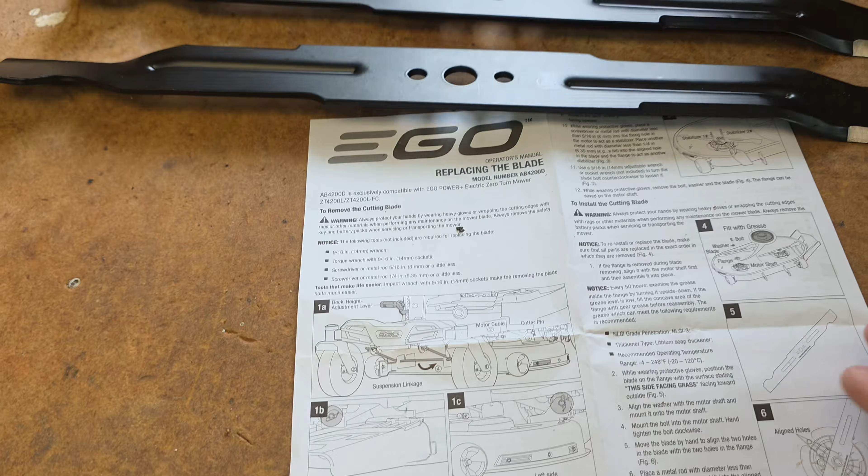Here's the model number of blades, for the 42-inch. You get 2 blades, I'll put a link to them in the show description notes. Here's the blades, they already come sharp, and I love that it comes with a manual in the box of how to change the blades.

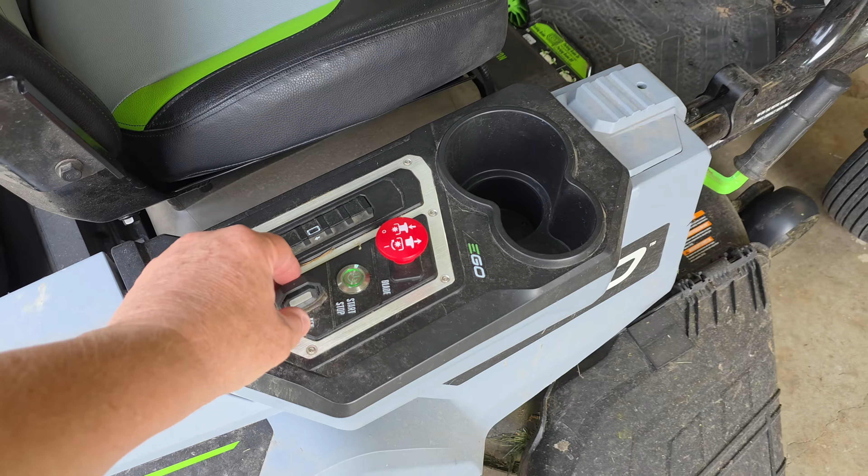So let's get started. I know because you're here to remove the deck. You want to remove the safety key. You can shut it down first, but I think removing the safety key takes everything away. Make sure the parking brake's on. As an extra precaution, I'm going to take the batteries out because it only gets power from the batteries. So I'm going to pop these batteries, that way it is completely dead. There's not even a light on here. There's no way, the charger's not plugged in. It is completely dead and the key's out.

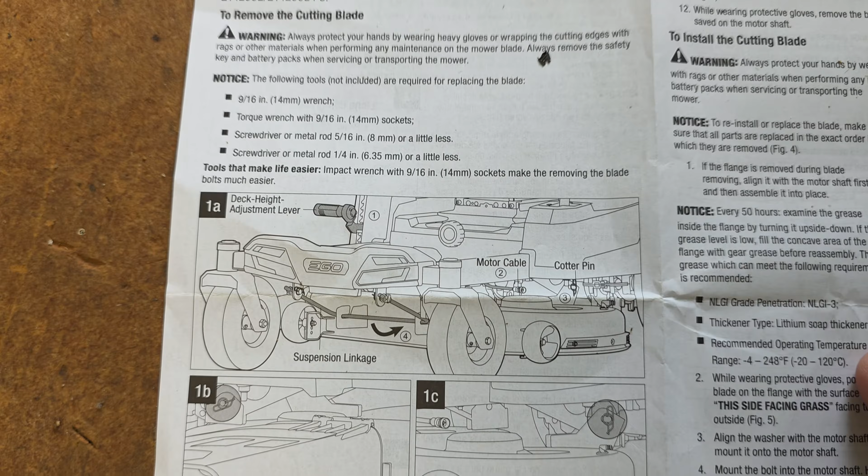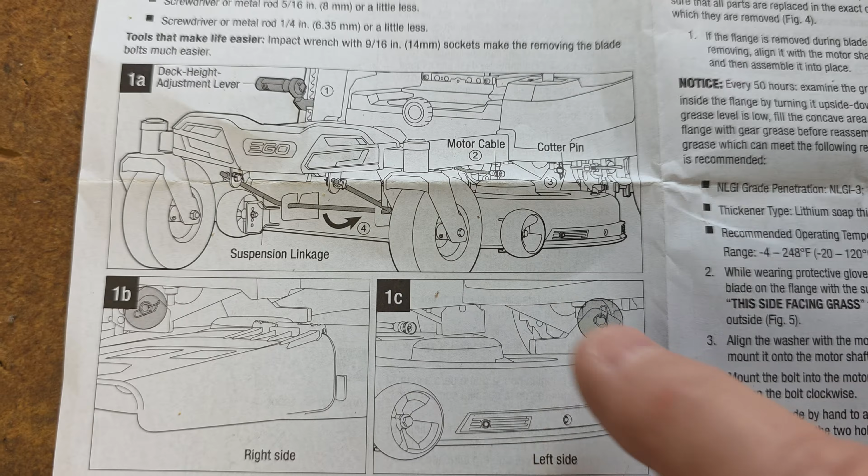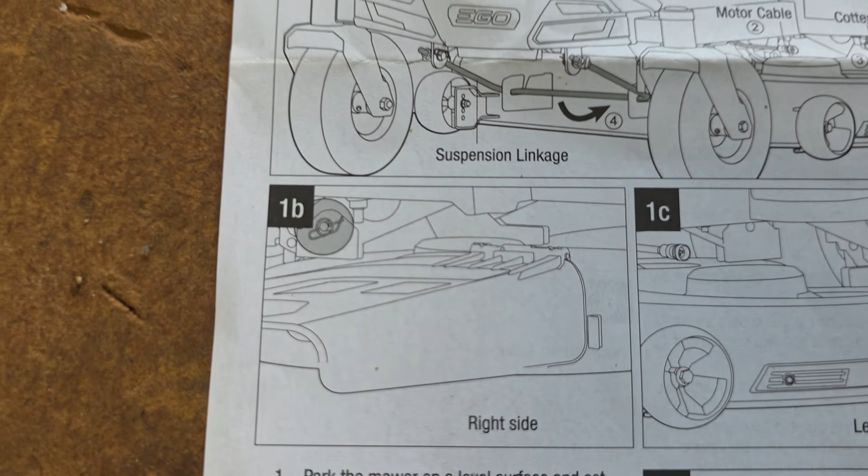Now we're going to need a 9/16 socket. You're going to put the handle, I'm going to show you these instructions. And again, there's the model number AB4200D for the blades. Put the adjustment height all the way down, and apparently there's 2 cotter pins. We got to remove the motor cable. I've never done this. And then there's that standard hook on the front, and then you're going to turn it out the side. It gives you a really fine, good detail of where those reusable cotter pins are, it looks like.

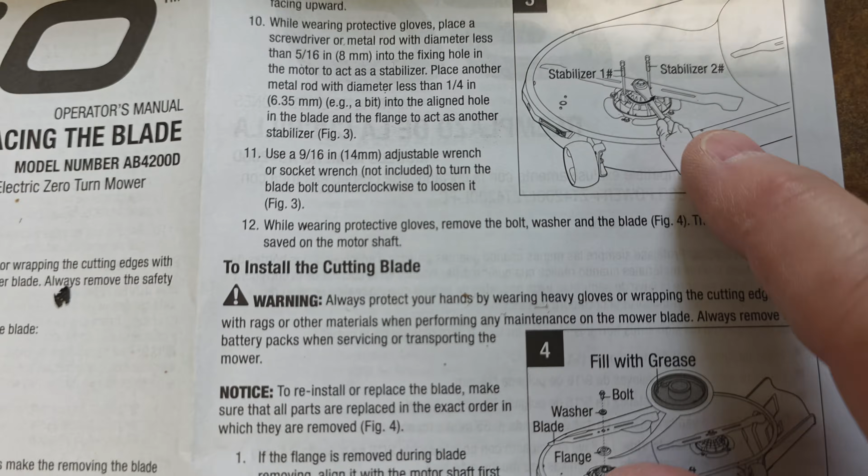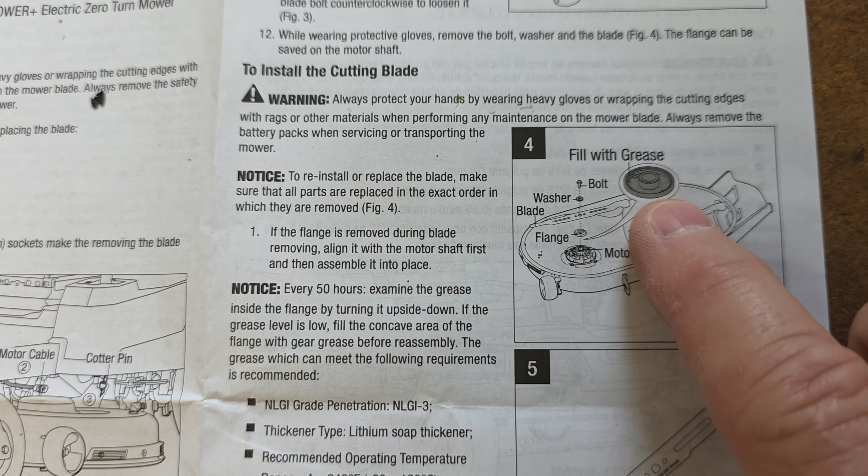And then you're going to put some stabilizer bolts in these holes to stabilize it. Take the socket, get it off. You're going to look for some grease, you may have to put some grease. It says every 50 hours examine the grease. We're going to find that, there's the specs on the grease. And then it's just reversing it.

One key feature is these blades say this side facing grass, so that's the downside. Both of these blades are exactly the same, and the blades are right at 21 inches, just a little under 21 inches each.

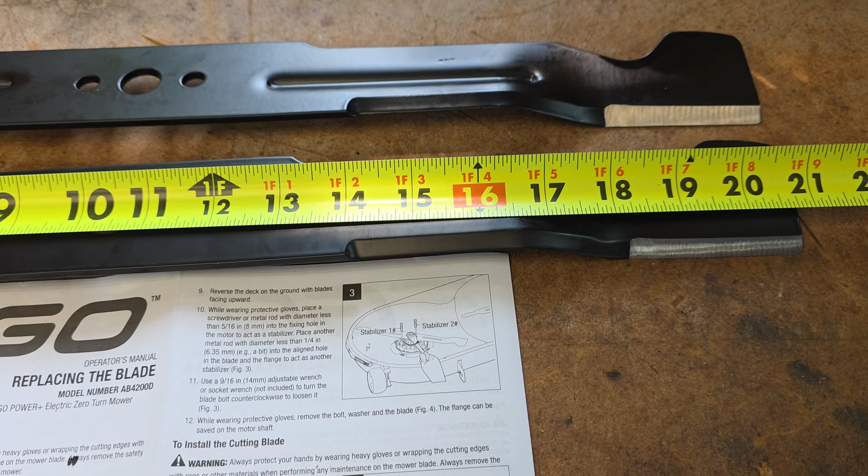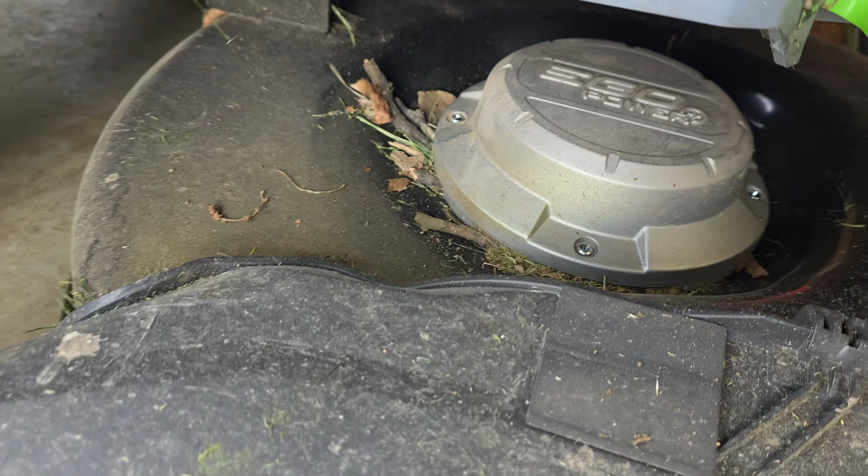Okay, draw a line so you know where to put it back to. Put that all the way down, it's kind of heavy. All right, it's all the way down. Now let's examine where these are. I've never had this deck off. Okay, that looks pretty simple, we're going to take that off.

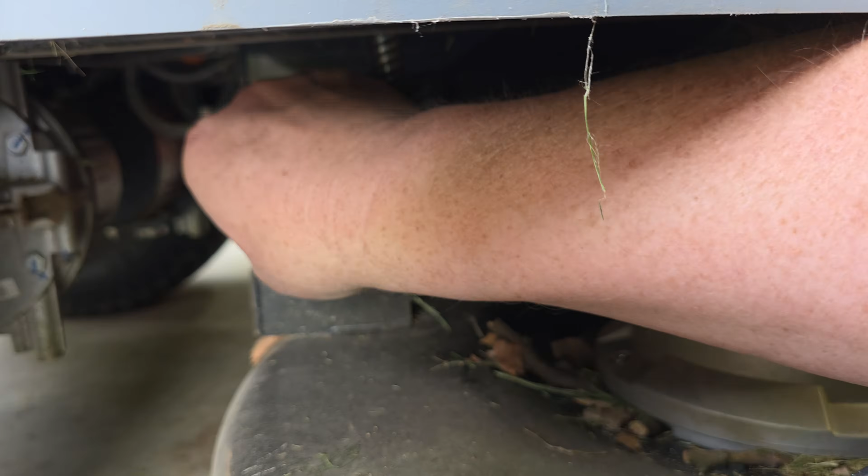I think if you lift, yeah, that is super easy. Oh, it's out. Now we got to take the clevis pin out, that might be a little challenging. We got to disconnect some cables. I'm going to get some gloves on.

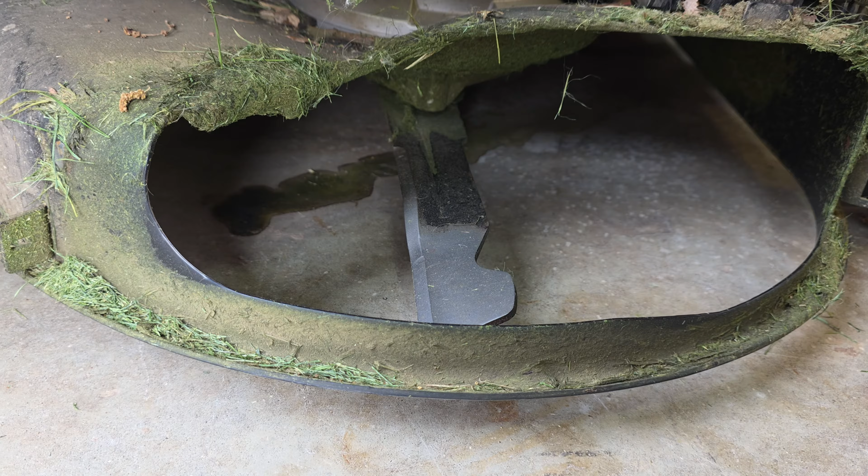If you're in a hurry, you might be able to do this without taking the deck off. Use a piece of wood to wedge it, put the deck all the way up and just use a 9/16 inch. That's what I originally planned, but I probably need to take this deck off, so I thought I would do a how-to video. These are the most amazing gloves in the world, made by Milwaukee. It's all I use now.

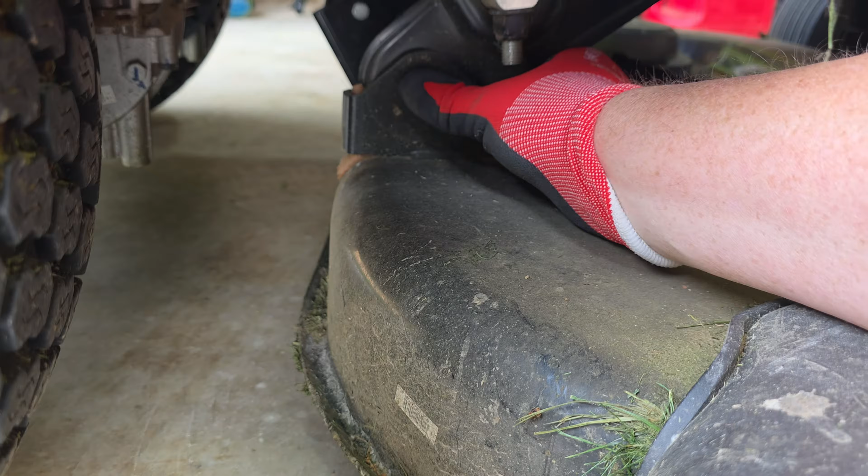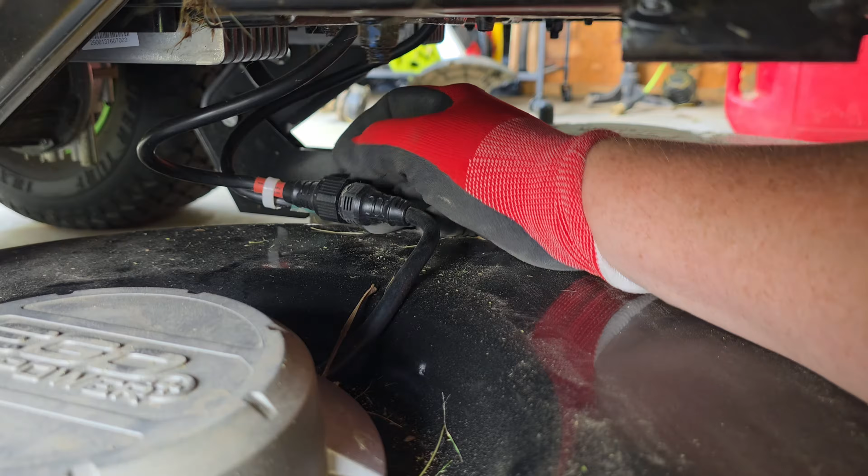Okay, that's going to be kind of tricky to get out, we'll have to do something later. There's 2 of these connectors. Let me undo one and then I'll show you how. It's going to take 2 hands, but I'm going to show you. You're going to turn this collar, that collar turns right there. It took me 2 hands to undo it. You want to hold this and turn that collar.

Hopefully it's focused for you. So there, yeah, then it just unscrews. All right, here's what it looks like. Looks like it's probably got some grease on it.

I definitely want to make sure the red is on the right and the other one's on the left. So maybe they're the same. I'm not sure, we'll see.

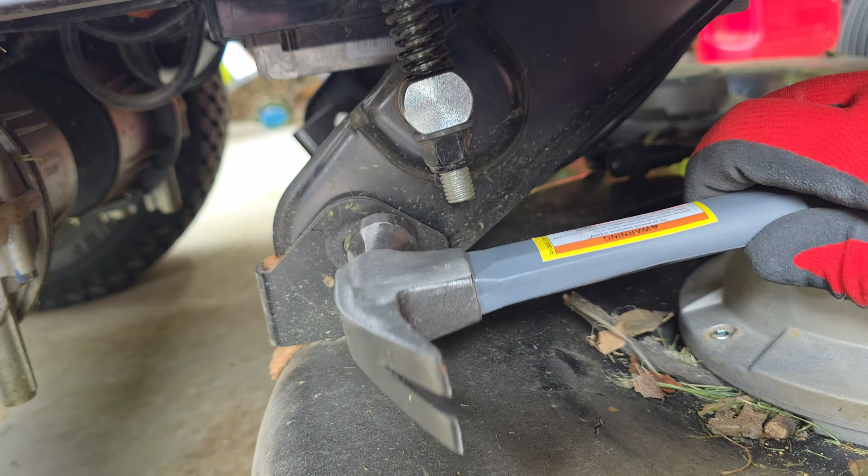Okay, so these pins don't require a whole lot of effort. You may want to just get like a punch. They're under a little bit of pressure. What I found is if you hold the deck up a little bit, it relieves all the pressure and the pin comes right out. So maybe somebody can help you, or just hold the pin or hold the deck.

This is my helper. Miss Fiona is supposed to be helping me, but she decided just to take a nap.

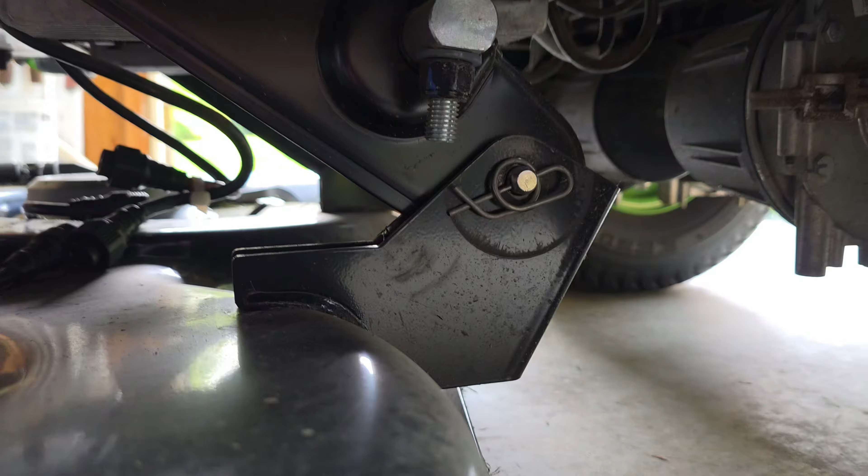All right, other side. Again, these are designed to be taken out. Let's see, lift this, that thing that's sticking up, that kind of lifts. And then you can just, oh yeah, ouch, you can just pull that out now. There, and again, yeah, I was lifting this piece right here. And then you want to reuse that.

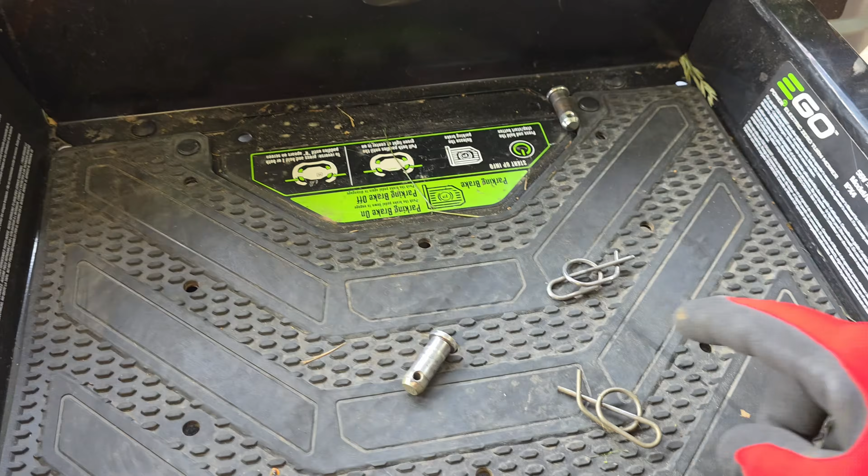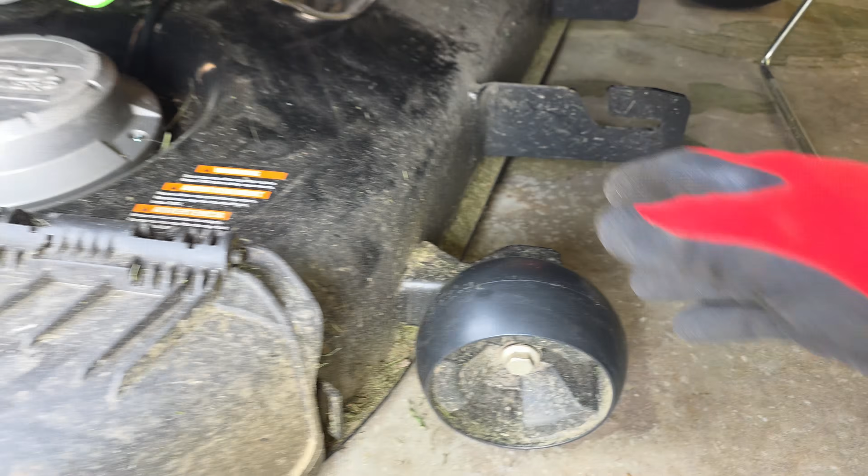And then, all right, looks like both clevises are the same, so save those. Now you got to rock it forward to disengage this, and then you may have to manually move these wheels out of the way. You're going to lift this up, disengage that, and then pull it out the side. It's not super heavy.

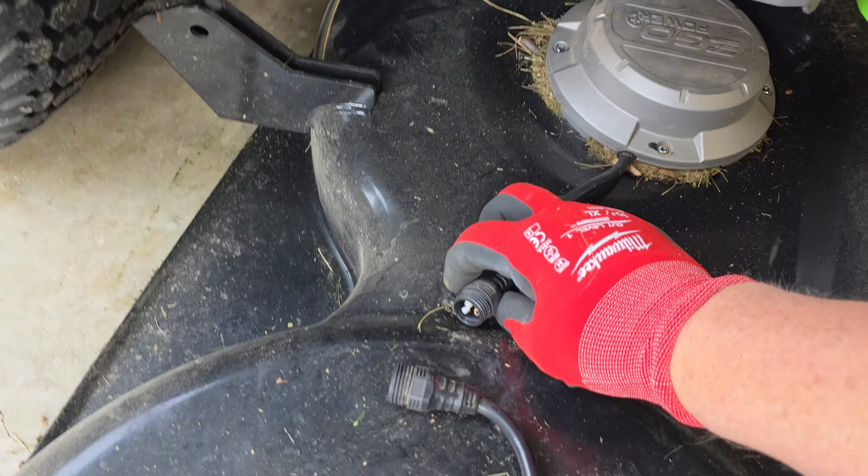All right, yeah, we want to make sure those look to be the same. So the red was on this one, the right one.

Now, while I'm here, I think I got a bunch of dirt and debris here. I've never had these apart, so I'm really nervous, but I think I'm gonna try to clean this out, and we'll flip. Now, when I flip it over, I'm gonna put it on some mats so you don't damage anything.

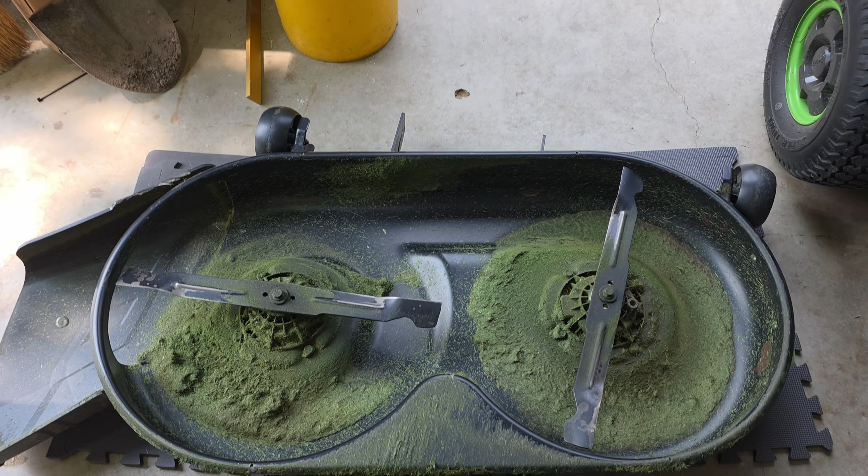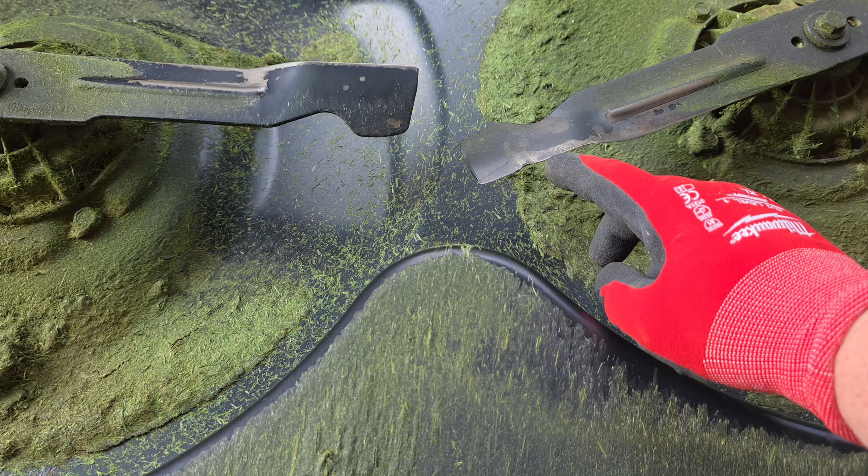Here's what mine looks like. 3 years of extremely heavy usage, mowing about 1 to 2 acres. I'm absolutely impressed. Now we mow the heck out of rocks and tree limbs, so in theory I could just sharpen these, but I'm going to replace them. That way I have a set ready to go. But these things, I have not replaced or sharpened for 3 years.

I'm going to scrape this. Man, this deck is held up. I mean, she mowed in the grass one time. Okay, we're getting a little bit of rust. That's okay.

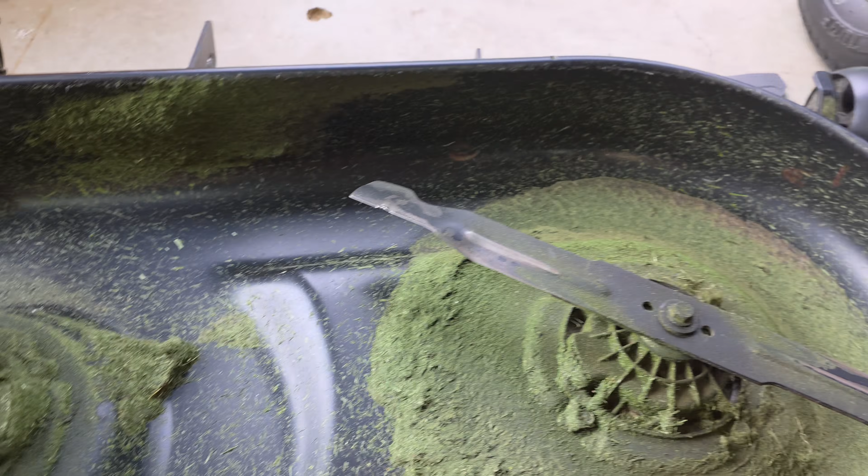We do keep it in the garage, so it doesn't get a whole lot of weather, but that's pretty incredible. I'm super impressed with it. Again, this is 3 years of heavy usage, our only mower. We sold our John Deere, we don't use gas anymore. Absolutely love this. That wasn't super heavy either. Our old John Deere was a bear.

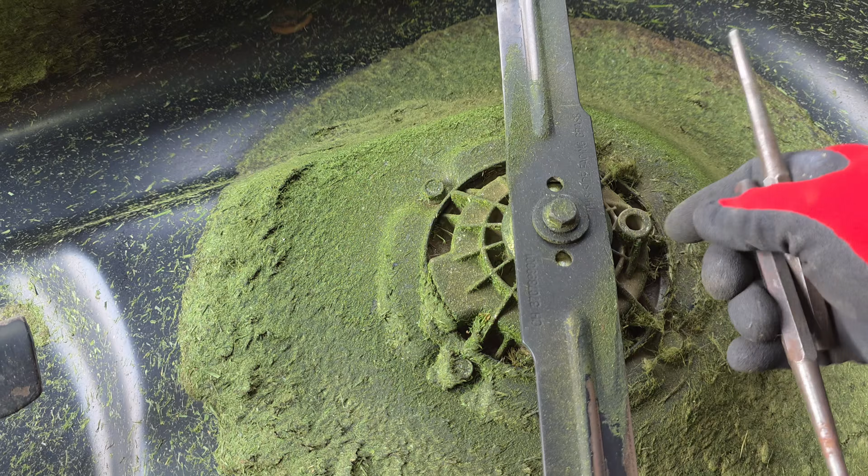Again, 9/16, now they say hold the motor. You're supposed to put something in there so that when you undo this, it holds the blade. I might use wood, maybe, I don't know. That seems a little fragile. Then it says put another one in this one, but that doesn't go through anywhere, so...

It's unusual, both of them are exactly the same way. Neither one goes through. Maybe that slipped and turned or something, but we'll figure it out. I'm going to try wood, maybe something there like that.

So I just used a piece of wood. This just felt more natural to me, I'm too afraid of breaking that. It wasn't on there super tight. Again, 9/16, and it's normal threads, not reverse threads or anything. So we want to save this washer.

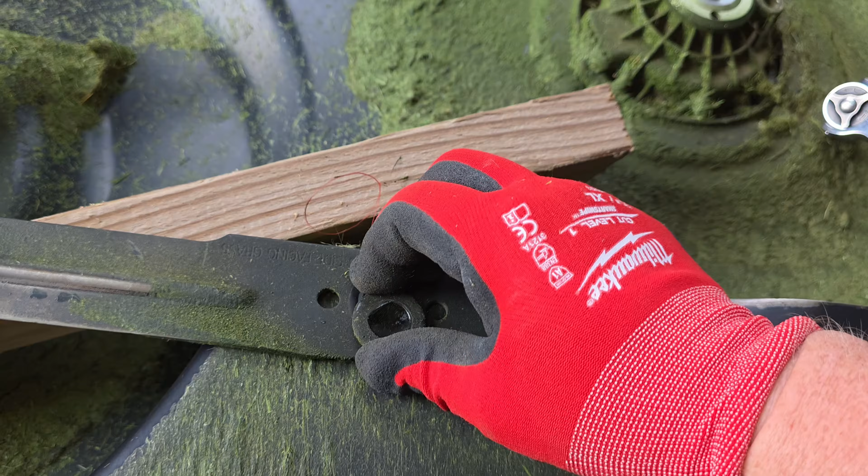Oh, maybe those are supposed to be lined up with those holes. I think they moved a little bit. I'm not sure, yeah, it seems like they moved a little bit. So that's why I couldn't put anything there. They were not aligned, they were like that. Yeah, see, the holes were over here.

There's supposed to be grease. Ooh, I think we're out of grease.

I think I gotta put grease down there. It's a little tricky.

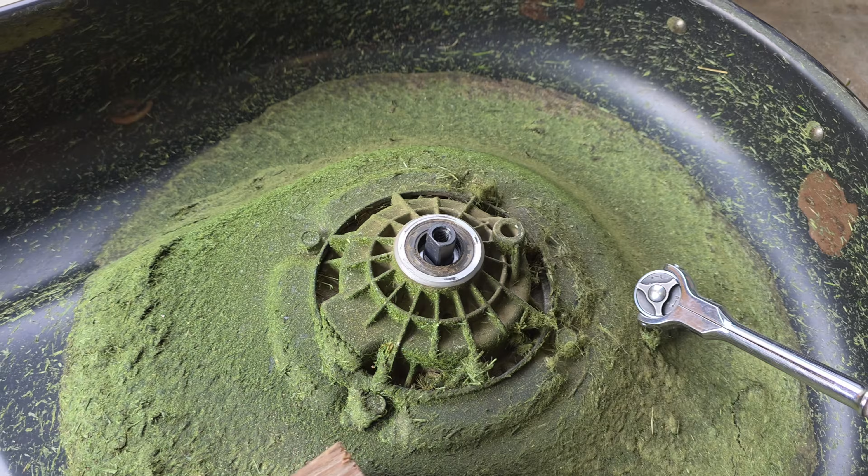All right, let's look. We took the bolt, the washer, the blade, and I took the flange off. And again, it says fill with grease.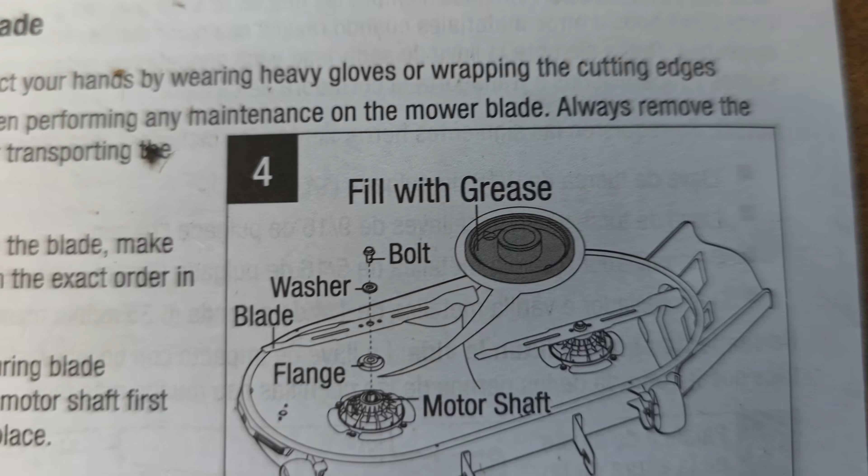There's no grease there. She woke up from her nap, I think she's gonna help me. But anyway, I recommend before we don't want to get any grease or nothing in there.

So I recommend cleaning the deck before you take the blade off. We don't want to scrape it too hard. But again, it has held up really, really good.

So we're going to get this all nice and clean, maybe even some of this around there. I think that just goes up to where I was seeing it on top, but we'll see. Okay, I'm not sure how to do this.

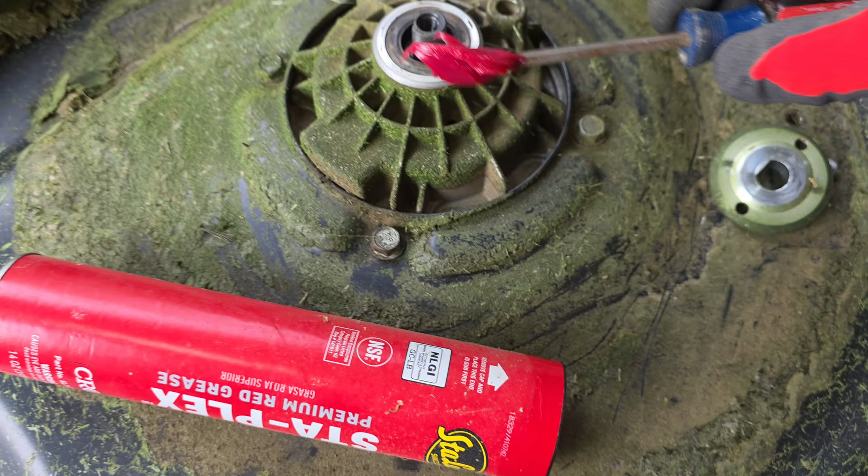We need to get some grease down in there. There's probably a better way. It doesn't take a whole lot, and then I'll wipe that off. I'll wipe all that off.

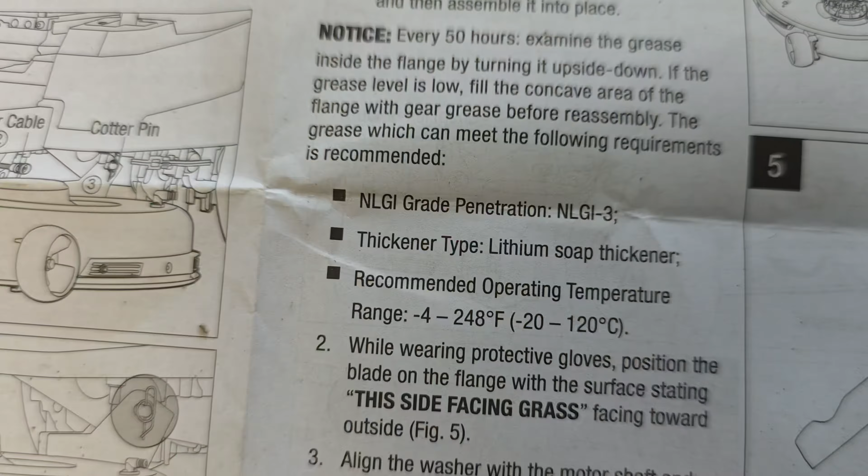There's the recommendations for, it just needs to be able to operate up to 248 degrees. All right, I'll wipe that off.

This side facing grass is gonna go up since I got the deck reversed. Oops, almost messed up. This looks in really good shape.

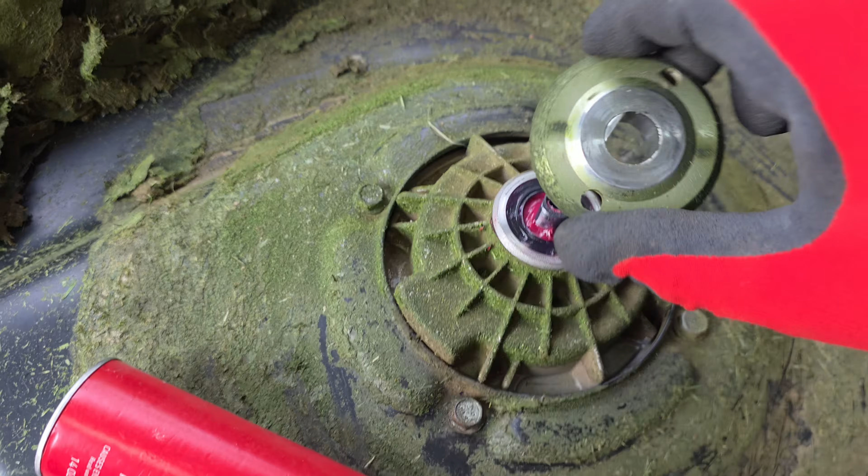I think a bunch of it's gonna smoosh out. There is a flat side. Yeah, and it smooshes out. So, in fact, it's hydraulicing up a little bit there.

All right, so yeah, it doesn't take very much at all. I used way too much.

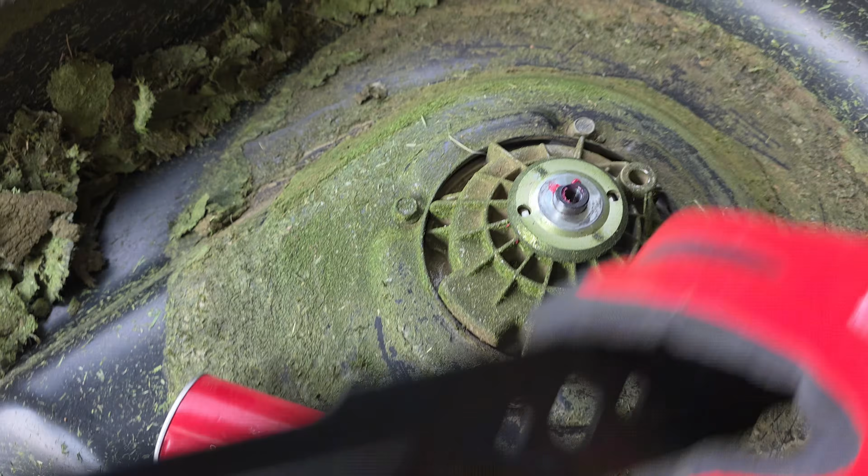All right, now we can put, now supposedly we want to line, oh, that can only go one way. Now we want to, there is no flat side to this, but we want to line it up with the holes, it says. You get the washer.

Washer has a flat side. And we want to tighten this down. Now I do want to use those things to tighten it down with. Now these quarter inch extensions, that seems to be the, I was going to use the wood.

I'm not sure how critical this is to do this, but we got to put one here and one in here.

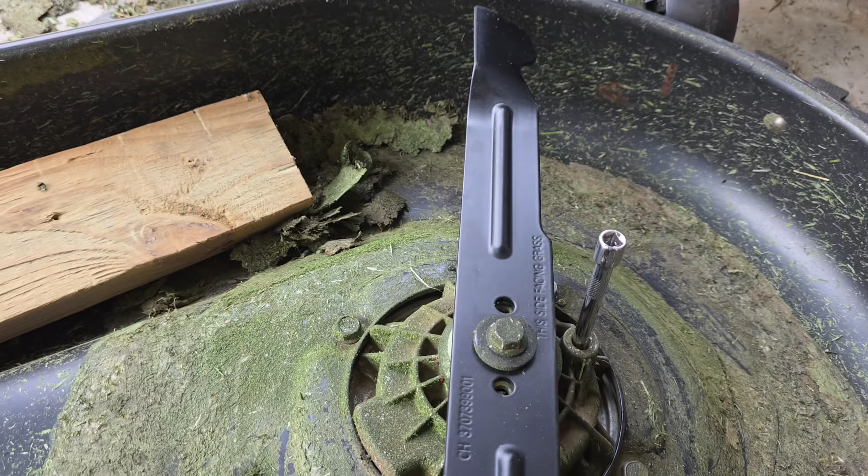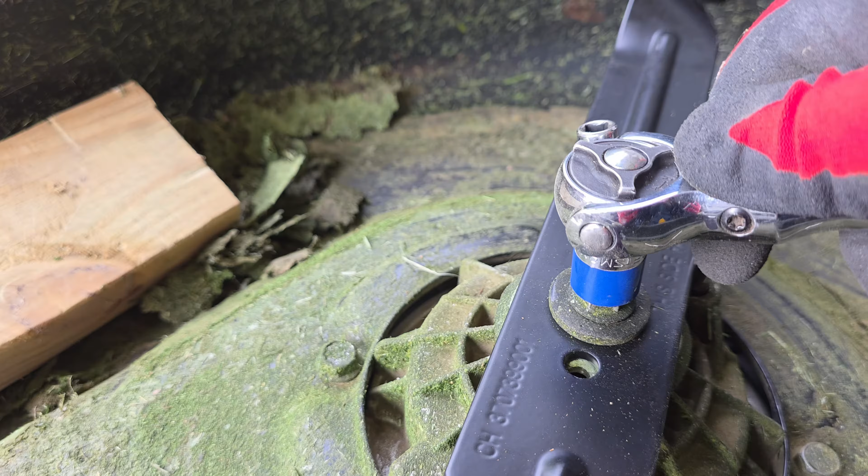It really wants to rotate, that's why. It's a little hard to do this. I'll show you, yeah, see. But there, I can get it.

And you're supposed to torque this. I don't have a torque wrench. We're gonna get it nice and tight.

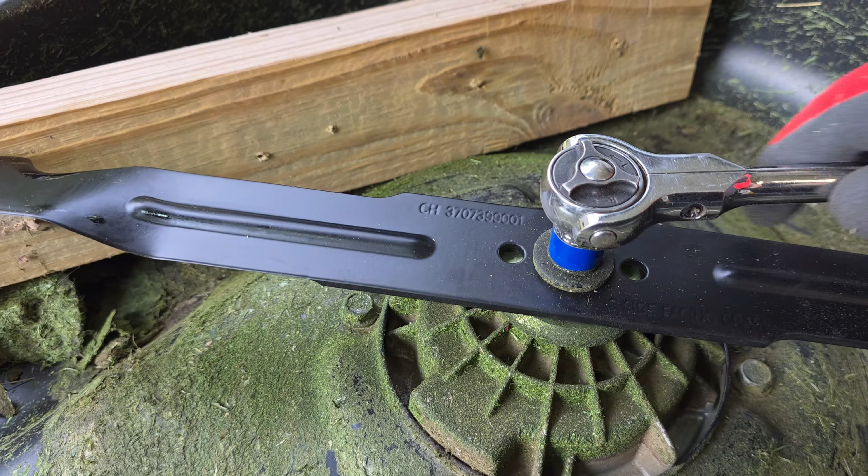So this is very important to use those. I just tried using the wood and it spins. You cannot tighten it with the wood because this part spins.

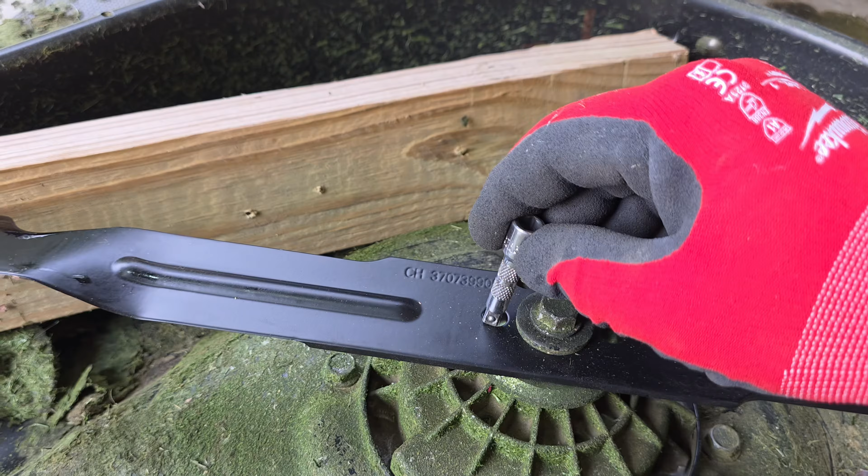So it is, this is something we're not used to doing, but these quarter inch extensions work the best. So I'll be able to get it off. I'm not too worried about it now, but that's why. Okay.

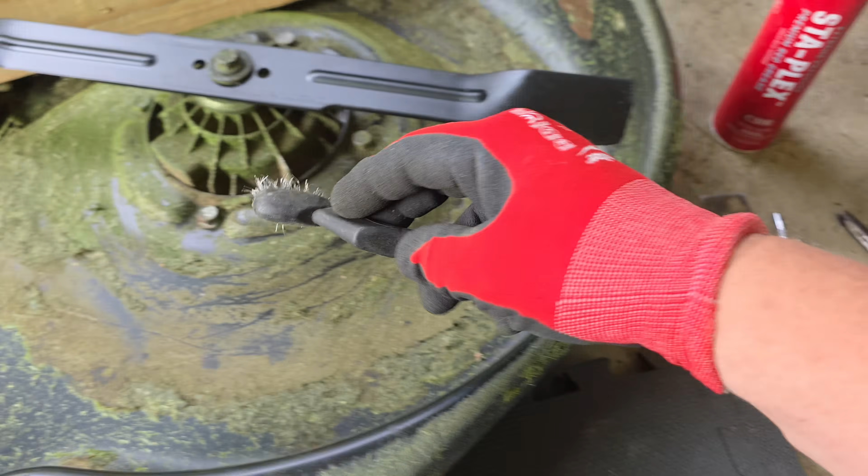Tools: scraper. This little wire brush worked good, just getting this stuff off. If you don't clean your deck, it will rust. I have a few spots that are starting to rust. And you could pressure wash this, I guess, or something.

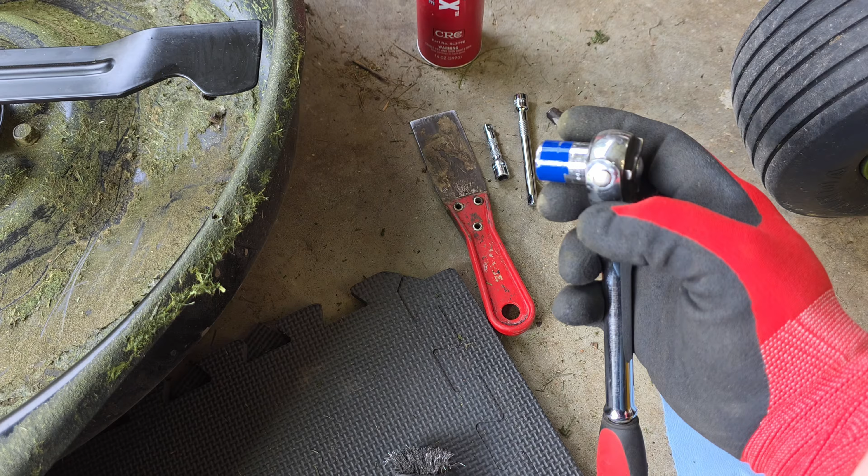You could do a little bit better job, but quarter inch wrench, 9/16, 3/8 socket. Some grease, you don't need much grease at all. Just get a little, just buy a little packet because it won't take much at all in there.

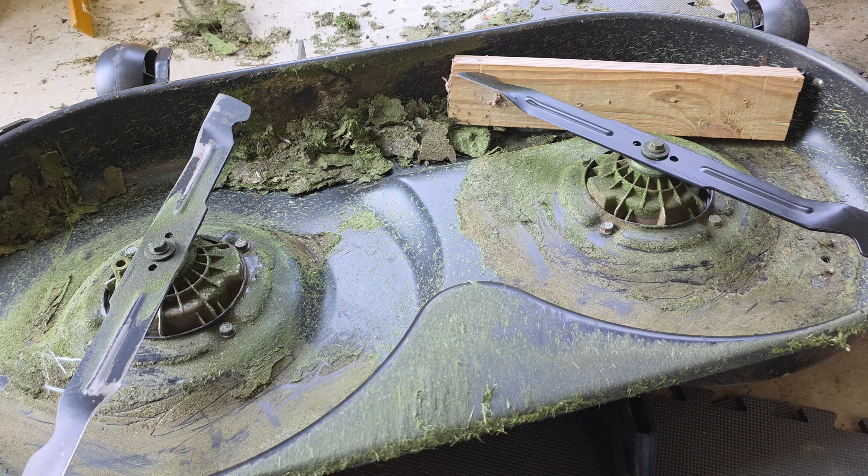Oh, and again, you could sharpen these. So get a grinder, you could sharpen those, and I'll have a set now to sharpen for in 3 years, hopefully. This thing's been, I cannot stress how good it's been doing.

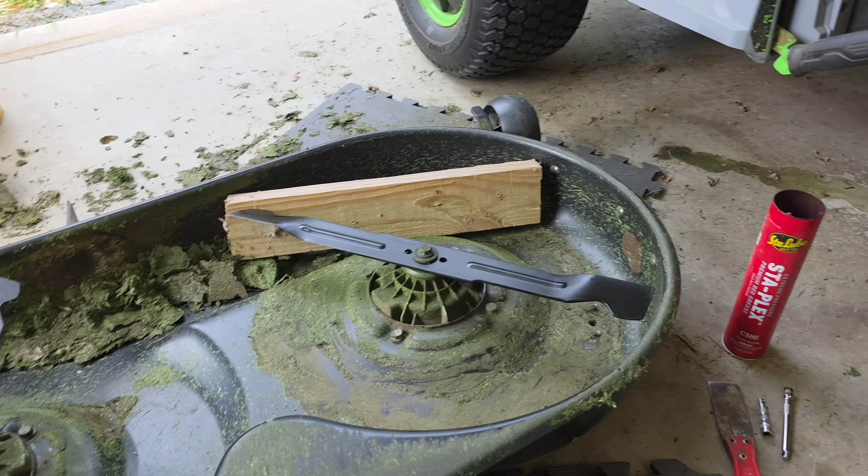But anyway, this is gonna take me about an hour and it'll get quicker each time. And then I'll show you, we're gonna reverse the order. Okay, it's not, I'm getting winded.

Slide it under. We're gonna have to put this front part in first. So make sure it's all the way back. So yeah, we gotta...

Now go forward. Come on. And both of those need to drop in.

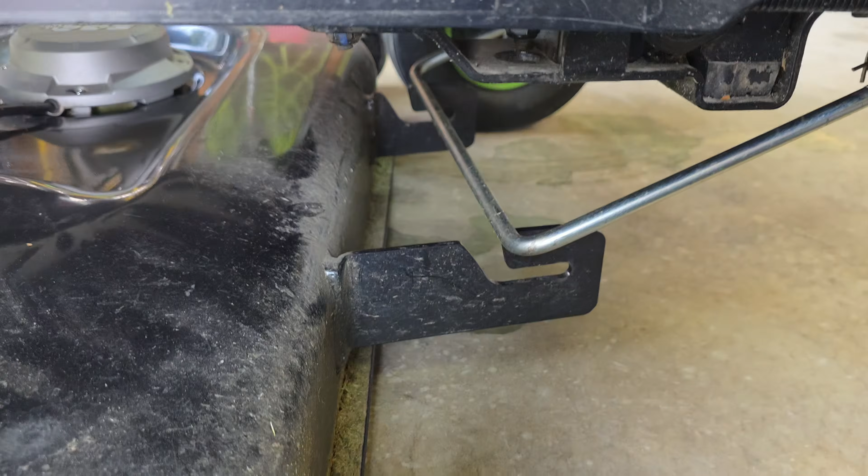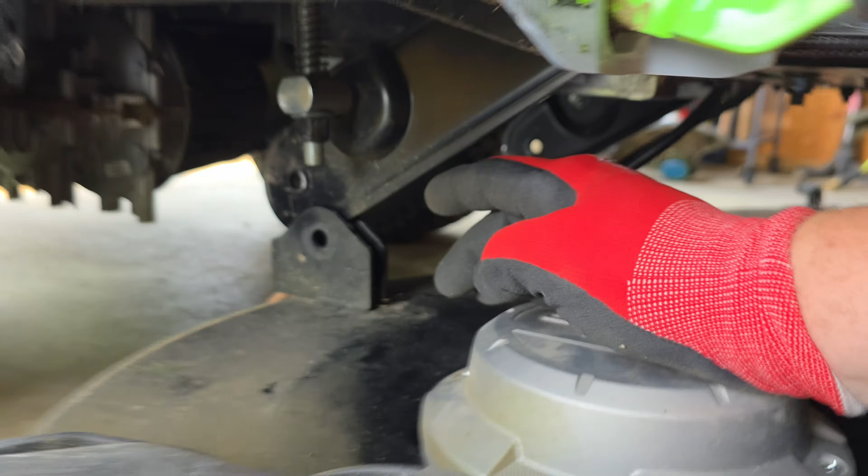All right, I've been struggling. There's a trick. All right, there's a trick. You need to get this in here on both sides, okay?

Then you're gonna push it back and then get this in like that, then push it back. Now you'll need somebody, because that's down all the way.

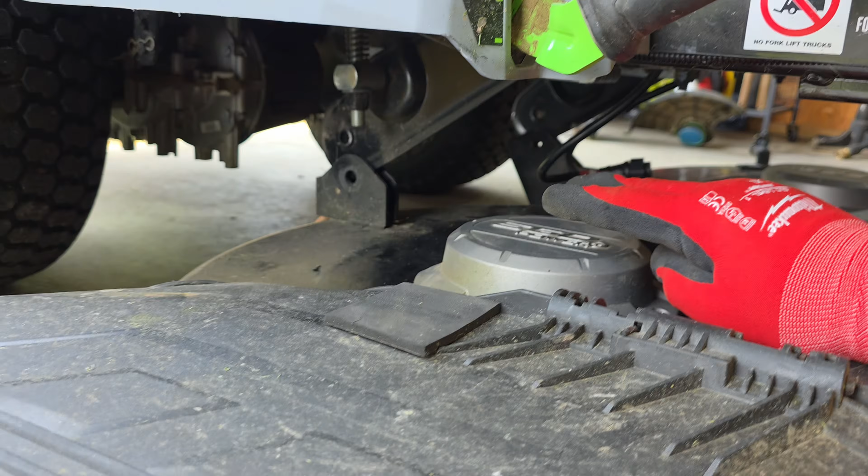So that was the trick. Get that in the groove on both, get it sandwiched in between on both sides. Then play with getting this in, moving it back and forth, and then lift up to put the deck pins in.

Hardest part, but I was able to do it. Put your hand underneath there, lift up, and you got to kind of wobble it around, and then you can slide the pin in from the back. And don't forget we got to hook up our wire connectors.

All right, other side went a little easier. Now let's put the pins in. See how that hook's going to be up? That's what we used to take it off. We lifted that. The 90 degree goes up.

This pin could be rotated any way, but you can rotate it for easy access. Then you're going to just kind of push. That hook should go up and over. And there, it's installed. Connectors.

Now, red, right - there's like an alignment. See how there's a flat spot? You have to kind of turn the connector. A little hard to do. Turn it, and then you're going to have to push it down. You don't want to bend those pins, but turn it till it kind of clicks into place, and then push it, and turn this. Don't force anything.

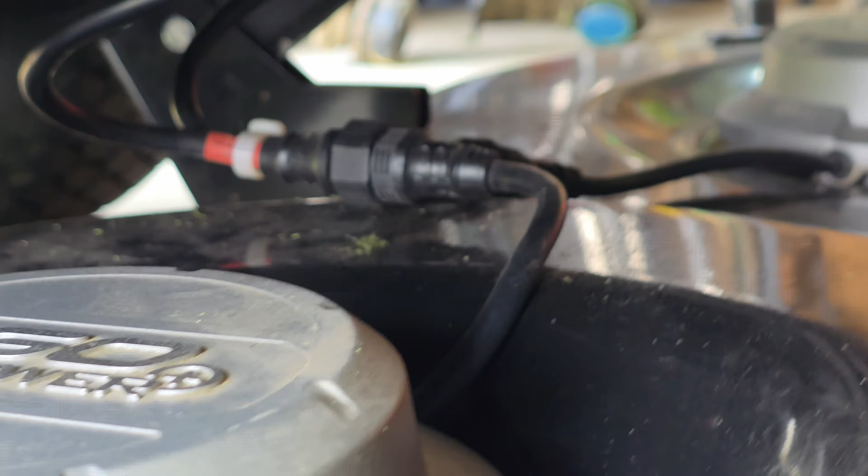I wish I could show - I laid on my belly, and on the left-hand side, kind of rotate it, and then you'll find the flat spot on the right-hand plug, and then kind of push. You got to push and you'll hear kind of a click. Then you can start threading this. This will not thread on until you push this part onto this part. You'll hear kind of like a click. You got to really push. It'll click, and then you can rotate this, and now it's tight.

That's a watertight connection, so it's good. Hand tight's good, just make sure it's nice and tight. And there, that's how they sit. I don't think there was anything else I had to do - there's nothing up underneath there. I don't see any grease zerks.

I'm going to check tire pressures, and I might check level. She said it wasn't mowing level. But there, blades installed. I don't know if there's anything I do in the app - I'm gonna connect it to the app too.

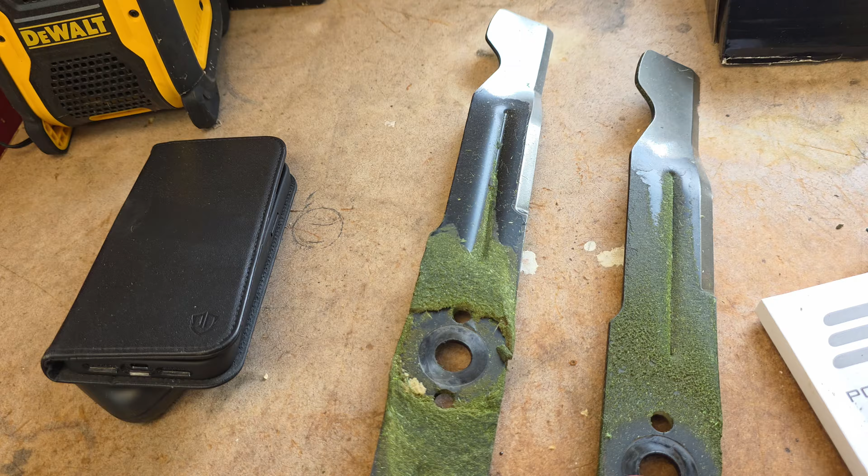Well, you ever have one of those jobs you just wish you could start over? The old blades were sharpened all the way up to here. I think my new blades are only sharp to there. I really like how they were - these things were awesome.

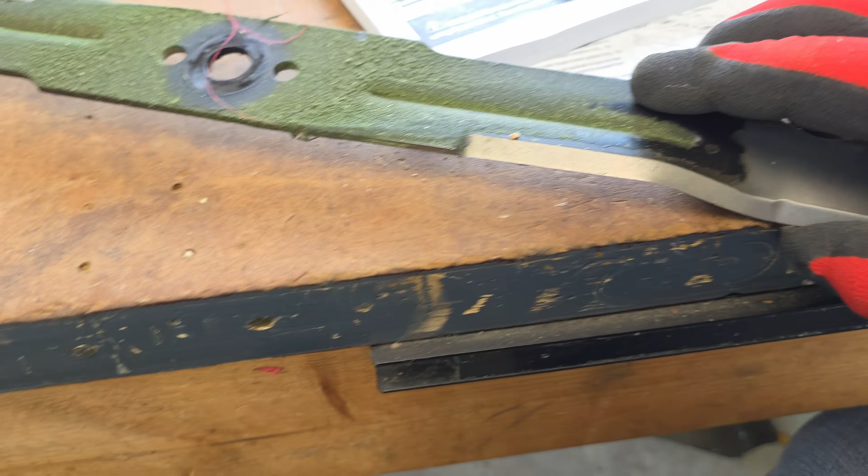I don't know if that's gonna - I should have put them side by side. So after I looked at the pictures of my old blades, this part is sharp, but it's painted. And you can see they kind of do an extra grind here maybe.

I hope that it's sharp enough to cut. But I did look at the pictures of the new blades, and this does have an angle on it. It just didn't look super sharp, but this part did. So I hope it's going to be okay.

Okay, tire pressures were definitely low, but there was a surprise. So the back one's 20 - I think it's supposed to be 24, but I put 26 in them. This one I had to take a picture, it's so hard to read. I only had 9 pounds in it, but it's supposed to be 46 PSI.

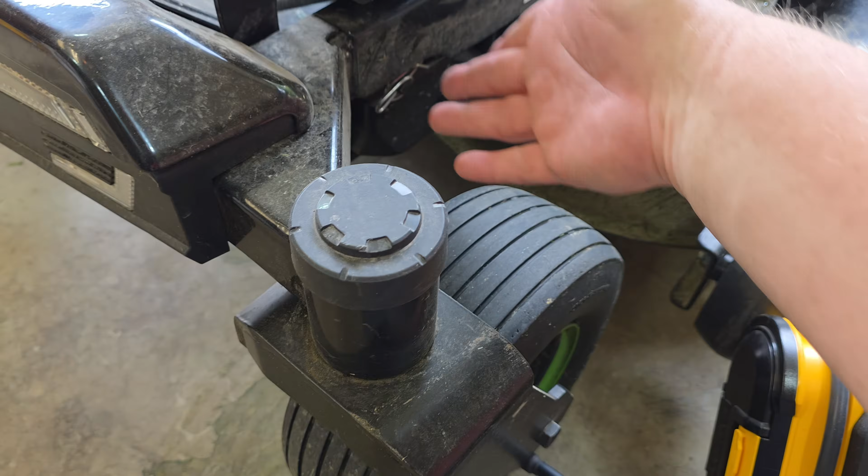That's pretty incredible. So, this is the best thing since sliced bread. I've got this big air compressor, but I don't hardly use it anymore, because you don't need a pressure gauge. You screw that on - I know Milwaukee makes one too, it's battery powered. It tells you the pressure, you dial in what I need. So I need 46. You hit start, and it shuts off automatically.

Okay, again, my tire pressures were low - 46 in the front, 26 in the back. These were about 9, so that's probably why it wasn't mowing good. There are adjustments you can make - there's a knurled knob underneath there. Hopefully I won't have to do that, but let's just, I've got it on.

There's my hours - 94, that's it. I've had this for 3 years, I thought it would be more.